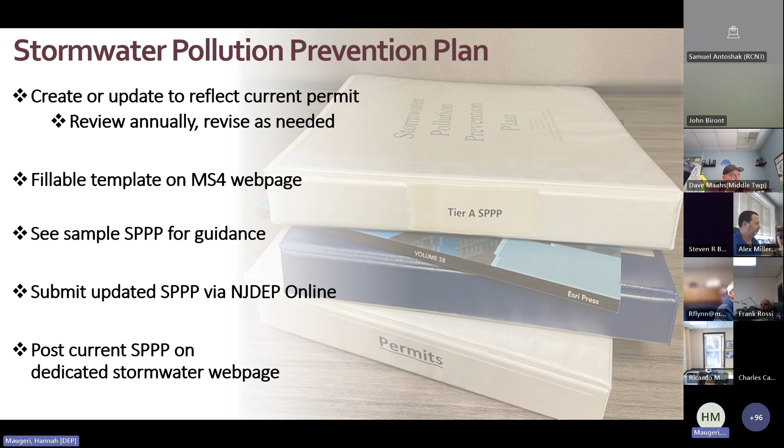So our biggest tip that we have is to take advantage of this template, and we also have sample SP3s that you can use. As mentioned, it's a fill-in-the-blank style template, and we have a sample if you want to get an idea of how to fill it out. The links here on the slides will take you to your appropriate SP3 template and sample. Roughly every 5 years, we renew the MS4 permits, so we'll update our templates and samples whenever that happens. As mentioned, you're not required to use them, but it's probably the easiest approach. If you do make your own SP3, that's completely fine. Just make sure you cover all the same topics with the same level of detail that we're asking for.

All right, moving into public involvement and participation, including public notice. Public outreach is something that all municipalities and public complexes have been required to do from the beginning of the MS4 program. To comply with state and local public notice laws, you will need to announce certain permit-related actions to let your community know when important updates are happening, such as the adoption of stormwater ordinances or the municipal stormwater management plan. Public notices are typically announced in newspapers, social media, and websites. You may also choose to send a direct email to residents and businesses in your town or residents living on the public complex property.

Stormwater materials must be posted on a dedicated stormwater webpage on your municipal or public complex website, where the public can find all stormwater materials in one place. Having a dedicated stormwater webpage is something new for all permittees, though original Tier A towns were already required to post materials somewhere on their website.

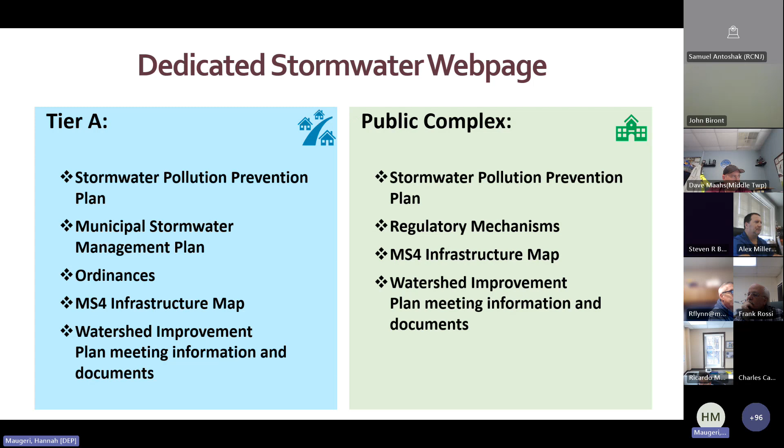Moving into local public education and outreach. As in previous years, the SPC will arrange for a variety of education and outreach to the public. For Tier A municipalities, we're still using a 12-point system where you can select activities from at least 3 of the 5 categories we describe in the permit attachment. One activity must educate on the hazards of illicit connections and improper disposal of waste.

Keep records of your activities and report them in your annual report. If you need ideas or materials, we have some on the MS4 webpage that you can use. For example, we have template style flyers that you can copy, insert your own town name and contact information, and then mail it out with something you were already going to mail, like your tax bills.

For public complexes, the public education requirement only applies if you have residents living on your property, such as colleges, universities, or military bases. You also need to earn at least 12 points.

However, the point system was simplified in the 2024 permit renewal. Now there are only 3 categories to choose from, where you must choose at least one activity from each category to earn the required 12 points. Similar to the Tier A requirement, one activity must educate on the hazards of illicit connections and improper disposal of waste.

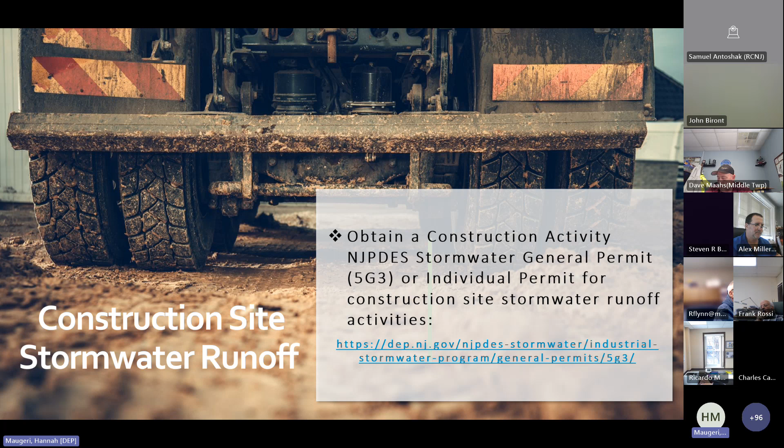Construction site stormwater runoff. The SPC must ensure that all entities whose construction projects will disturb 1 acre or more, or are part of a common plan of development that will disturb 1 acre or more, obtain a 5G3 or an individual industrial stormwater permit before starting construction. This is not a new condition to either permit, but please note that the 5G3 permit was renewed in 2022 with some minor changes. It applies to projects undertaken by the permittee, as well as private companies and individuals.

Post-construction stormwater management in new development and redevelopment. This condition highlights the requirements related to stormwater management designs for major development projects. If you're the SPC but not the engineer, you won't need to know the technical details, but you do need to be familiar with the process.

Engineers who review and approve major development projects must be different from those who design the projects. They can work at the same firm if that's something that you outsource, but the person who designs it can't be the person who reviews it.

Review engineers must complete the department's Stormwater Management Design Review (SWMDR) course every 5 years to stay certified. They also need to attend training on rule amendments if the department determines that training is warranted. DEP certification has always been required for original Tier A towns and public complexes, but it's a new requirement for new Tier A towns and new public complexes. We'll talk more about this when we get into the training section.

You can check our webpage for the list of department certified engineers to confirm the status of your engineer for your facility. The reviewer must ensure that the projects are designed in accordance with the 7:8, the BMP manual, and constructed according to the approved plans.

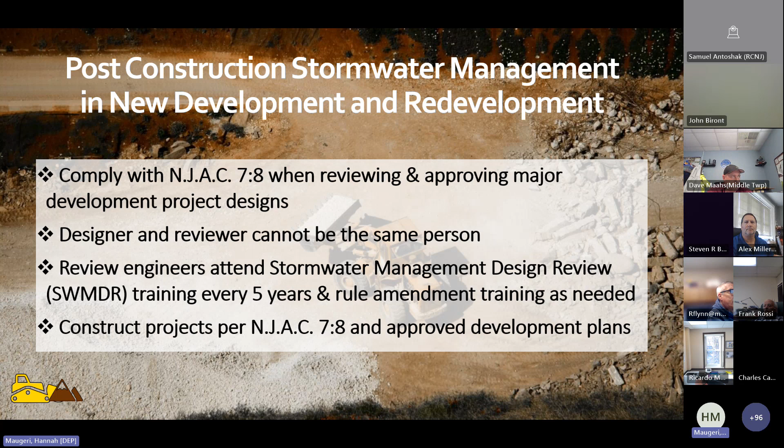For Tier A permittees, the MSWMP is a high-level description of your municipality's strategy and stormwater infrastructure used to reduce flood damage, minimize stormwater runoff and soil erosion from development, maintain groundwater recharge, maintain stream integrity, and minimize pollutants in stormwater runoff, all in a way that protects public safety. This is part of the town's master plan.

The MSWMP has been a requirement of previous Tier A permit iterations and the old Tier B permit. If you're not familiar with this, check out the MSWMP model posted on our webpage. The department will be updating our model at some point in 2025 to reflect the most recent stormwater rule amendments. Even when there are no changes to your MSWMP, the town needs to re-examine it at least every 10 years, along with the master plan, and send it to the county for reapproval.

The Stormwater Control Ordinance, or SCO, is your town's mechanism to enforce proper stormwater management designs for major development projects. This is also not a new requirement for original Tier A's and new Tier A's, as it was required in previous permit iterations as well. For starters, you should know what your town considers a major development project. Does it match the definition in the stormwater management rules, or is it more stringent?

In July of 2023, we shared two versions of the department's revised model SCO and posted them on our website to reflect the most recent stormwater rule amendments. One includes language that simply cites the applicable subchapter and sections of the stormwater management rules instead of the full text, so when the rules change, you don't necessarily need to amend your SCO. The other is a longer, more detailed version that includes the full text. So if you use that one, future amendments to your SCO will be more likely.

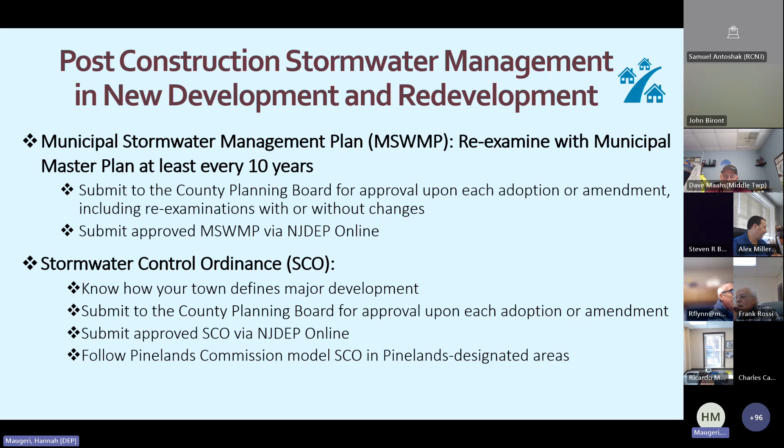Each amendment to your SCO must be submitted to the County Planning Board and the department and be posted on your dedicated stormwater webpage. Pinelands towns should follow the Pinelands Commission's SCO model in designated areas. This means for towns that fall partially within Pinelands areas, you will be required to have two SCOs to reflect the different areas of the town. The permit requires updates to the MSWMP and SCO to reflect amendments to 7:8 within one year of rule adoption.

Mitigation plans are an option for both Tier A permittees and public complex permittees. If your facility wants the ability to grant variances from the design and performance standards for your stormwater management measures, there needs to be a written mitigation plan that satisfies the criteria in the stormwater management rules and identifies the measures necessary to offset the deficit created by granting that variance. Each time your facility grants a variance, you need to send a report describing the variance to the department via NJDEP online within 30 days of the approval.

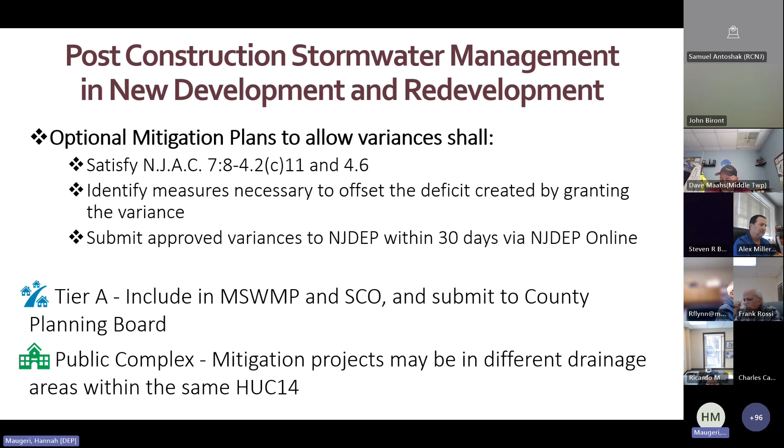For Tier A permittees, the mitigation plan must be included in your MSWMP and SCO, and you also must submit a copy of the report for each approved variance to your county planning board. For public complex permittees, the measures necessary to offset the variance can be provided through a menu of design and performance standards with corresponding mitigation projects for different drainage areas within the same HUC 14.

Ordinances and regulatory mechanisms. Earlier we talked about the stormwater control ordinance for Tier A permittees, which is related to major developments. This set of ordinances and regulatory mechanisms is aimed at minimizing stormwater pollution and flooding throughout the community, not just at major development sites.

The purpose of community-wide ordinances and regulatory mechanisms is to have methods in place to keep pollutants out of the stormwater so it doesn't make its way to streams, lakes, and other water bodies where it can contribute to harmful algal blooms, cause beach closings, and a host of other negative impacts. They help keep the community clean by setting a standard for the public and ensure you have a way to punish those who violate these ordinances and regulatory mechanisms.

Let's briefly go through each community-wide ordinance and regulatory mechanism that permittees are required to adopt and explain their purpose. First, we'll talk about the ones that apply to both Tier A and public complex permittees.

Pet waste: this is intended to require people to clean up after their pets so their waste stays out of the stormwater system and ultimately out of the watershed. For public complex permittees, this can also be used to prohibit pets other than service animals from being allowed on your property. Wildlife feeding: this is intended to keep people from feeding wildlife like ducks and geese, to discourage them from gathering where they can leave droppings and pollute the watershed.

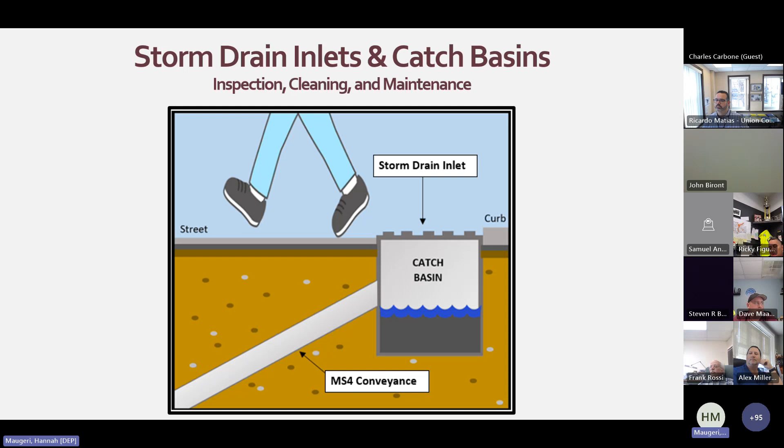Let's talk about the difference between storm drain inlets and catch basins. This little cartoon picture is cute. The storm drain inlet is the top grate that you can walk over, like this guy. You can walk over it, you can drive over it, and if it's along a curb, it includes the curbside opening part. So we consider the inlet to be the parts you can see on the surface. The catch basin is below the surface, either straight below the inlet or sometimes further down the pipe.

Here's some real life photos. The picture on the left shows an inlet that needs cleaning, labeling, and retrofitting - all things are wrong with it. It's missing the bar along that curbside opening, so we'll talk more about that in the next slide. The one on the right, the inlet grate has been removed, allowing you to see the catch basin. Just be careful - you never know what you're going to find down there.

We're going to be silly every once in a while. This catch basin has some trash and leaves in there that needs to be cleaned out. So that's what we're talking about - storm drain inlets on the left, catch basins on the right.

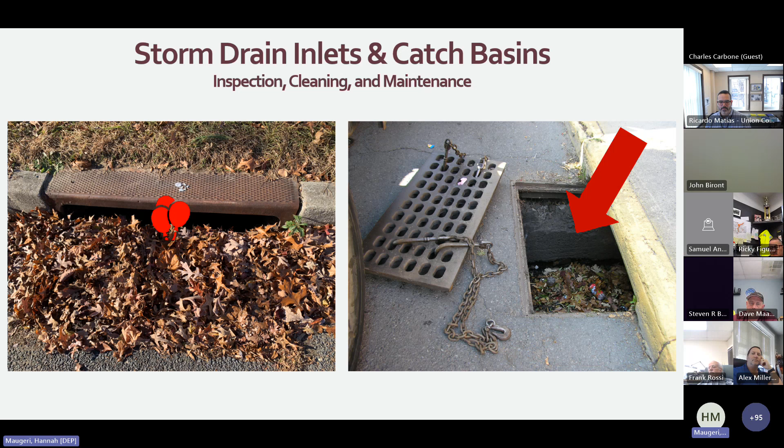Let's talk about the structure with the labeling. For storm drain inlets, there's a few things to keep in mind. First, they need appropriate labels to indicate that they drain to waterways. Newer inlets have this wording permanently cast into the structure, so you don't have to worry about it, like the picture on the bottom shows. If you have an older model inlet that doesn't have this, you can attach a button on it, like the one above that says no dumping. Otherwise, you can paint a message with a stencil, or get creative and do an artistic design to convey the same message.

All permittee-owned storm drain inlets need to be retrofitted by the end of your permit cycle. For Tier A's, that means by the end of 2027, and for public complexes, by the end of 2028. You do not need to replace these inlets - you don't have to rip them out and put new ones in. What you do need to do, if nothing else, is add a bolt-on plate across that curb opening if you have an old style structure, like the one in this top right picture.

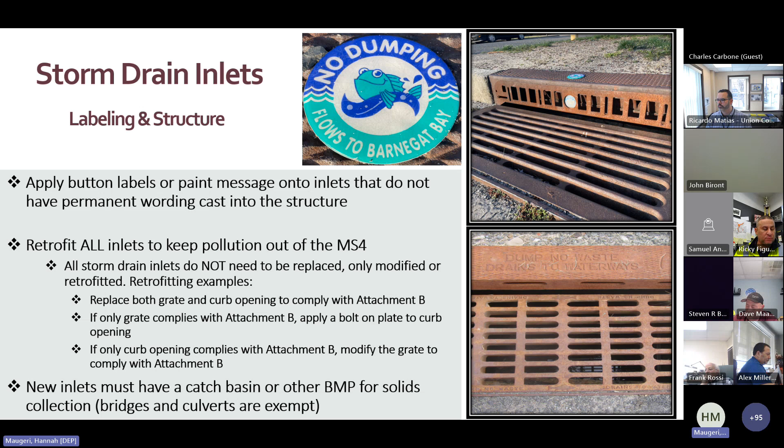If you're installing a brand new storm drain, you're required to use the new style inlet that complies with the NJDOT design for bicycle safety. We have those requirements in attachment B of the permit. New storm drain inlets also need a corresponding catch basin designed for solids collection. It can be directly below the inlet, or a little downstream, as long as it's prior to discharging to surface water. Storm drain inlets on bridges and culverts are exempt from the catch basin part of this requirement. That's pretty much everything about the structure.

Let's talk about inspection, cleaning, and maintenance. For storm drain inlets, remember the top part you can see - these inspections are super easy. You can just drive around and take a look at what they look like. If there's a problem, you hop out of the truck and clear off the trash, leaves, branches, or whatever debris needs to be removed.

Or if you see signs of damage while you're driving, you can just stop and see what needs to be done. So because it's so easy, we require that all permittees, Tier A and public complex, inspect all of their storm drain inlets once a year.

Catch basins, on the other hand, do involve a bit more work. The inspector would need to get out of the truck, look down inside with a flashlight or a stick, and possibly lift the inlet grate to see if the catch basin needs cleaning. For Tier A permittees, the requirement is to inspect at least 20% of your total every year on a rotation, so by the end of the 5-year permit cycle, all of your catch basins have been inspected. You can do it more often, but that's the minimum.

Public complexes have considerably fewer catch basins, so we require that you inspect all of your catch basins every single year. When it comes to catch basin cleaning, we don't tell you what to do—just check your manufacturer's recommendations. You can also look at the EPA; they have guidance on their website that advises removal of materials when the sump pit becomes 40% full.

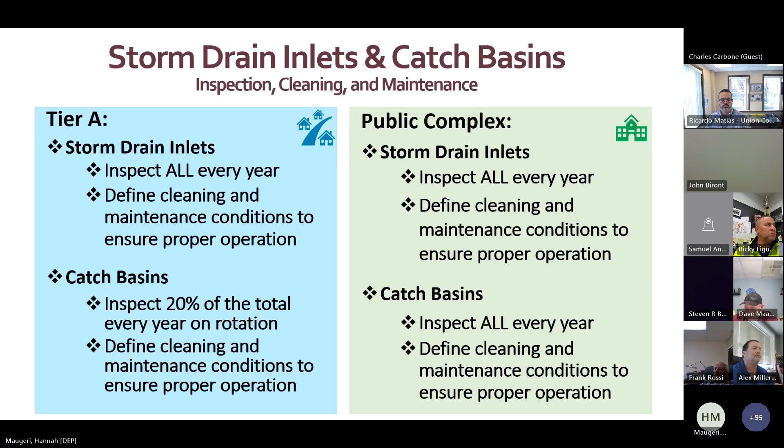All right, let's shift gears. Let's go to outfalls, where all your stormwater comes out. For outfall inspections, Tier A permittees, because you have a lot of these, need to inspect at least 20% of your total every year on a rotation, so by the end of the permit cycle you've hit all of them. Public complex permittees have way fewer, so we require that they're inspected every single year.

Whenever you identify or newly construct an outfall—sometimes during mapping you realize you didn't know this one was here—it needs to be inspected within 30 days of identification. The department has outfall inspection forms on our webpage to document your findings, if you don't have your own. These inspections need to include checking the structural integrity of the outfall, and looking for clogging, instances of stream scouring, and illicit discharge. We'll talk about that more closely in the next couple of slides.

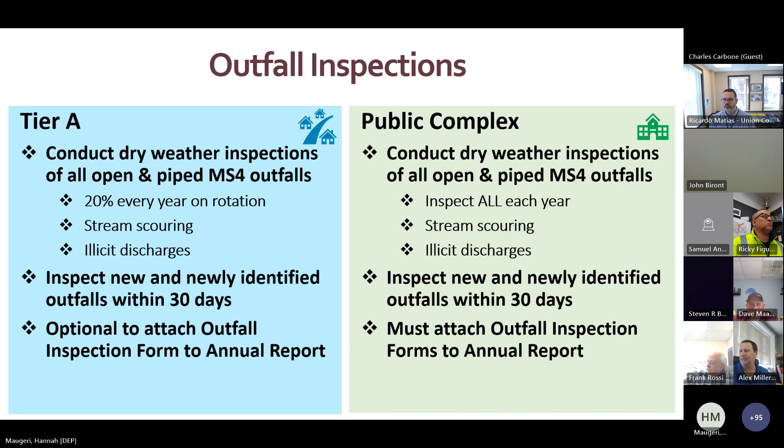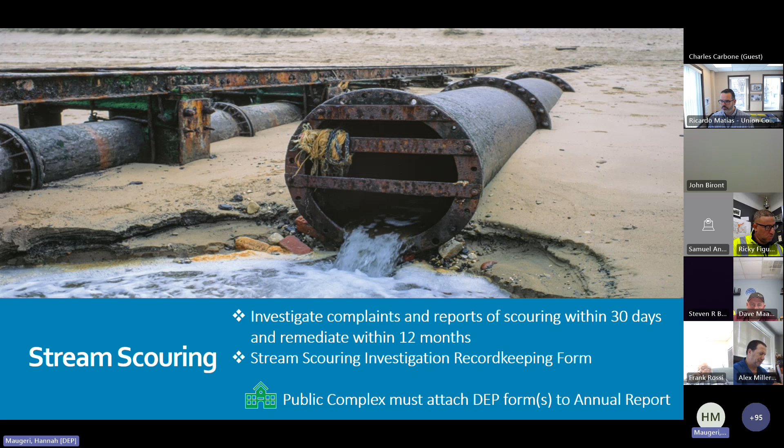Let's go over to illicit discharge. When you're at your outfalls, you're looking for the same things—structural integrity, scouring, and illicit discharge—making one stop for all these things. When inspecting for illicit discharges, look for instances of dry weather flow, meaning flow coming out of the outfall 72 hours after a rain event. Other indicators include foam, turbidity, colored or overly fragrant discharges, and the presence of sanitary waste items like that one.

All reports of illicit discharges need to be inspected within 30 days, and confirmed cases need to be remediated within a year of discovery. This is something both of you need to keep in mind: whether you're a Tier A or a public complex, all permittees that have an illicit discharge problem need to record it on the department's form and upload it with your annual report.

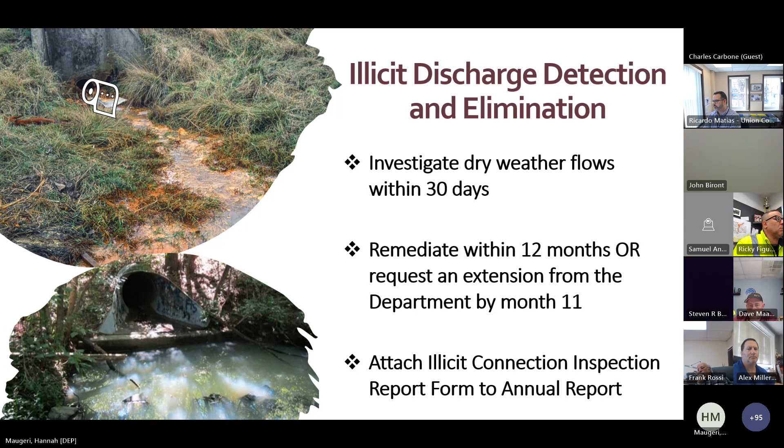Historically, very few outfall problems have been reported to the department, yet we have tons of problems with stormwater flooding and pollution persisting. So we've started working with the New Jersey Watershed Ambassador Program and other watershed groups using this new outfall observation form.

It's something for concerned citizens to report potential cases of damaged outfalls, stream scouring, illicit discharge, whatever's going on out there. This citizen science approach is a great resource to assist towns and facilities to identify potential stormwater outfall problems. We strongly encourage citizens to contact their municipality first to address these issues, but if it comes to us, the department will review these reports. Our first step is to reach out to you guys—we're not going to just come out there and go crazy with it. We're going to contact you to see what's going on, and most of the time you probably already know what's happening and can give us an update.

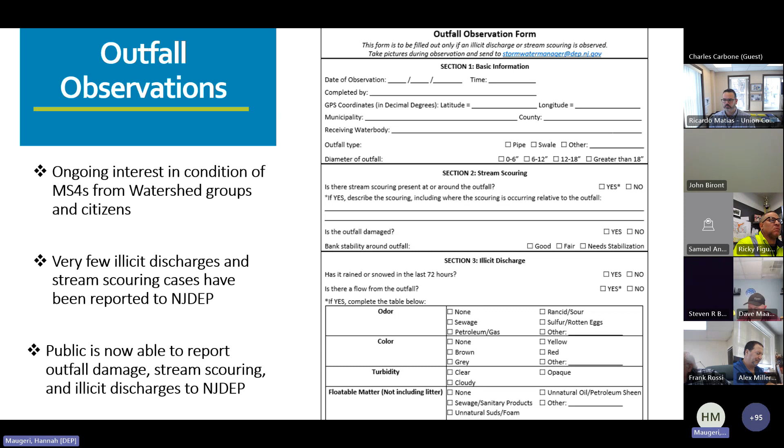Okay, so that's it for outfalls. Let's move over to MS4 conveyance systems. A stormwater conveyance system includes any man-made feature that conveys stormwater—typically pipes, ditches, swales, or concrete drainage channels, that sort of thing. It's not a new permit condition for MS4 permittees to manage these, but what's new is that you need to describe your inspection and maintenance program in your stormwater pollution prevention plan. And since you're putting it in there, you'll also be covering it in your annual training of staff who do work on the conveyance systems.

We do not specify in the permit exactly when you should do inspections and maintenance, since there's so much variation in conveyance systems. So what we ask is that you tailor your program to best suit your system. We do have guidance on our website if you need it, so feel free to check that out and reach out to your case manager if you need other help.

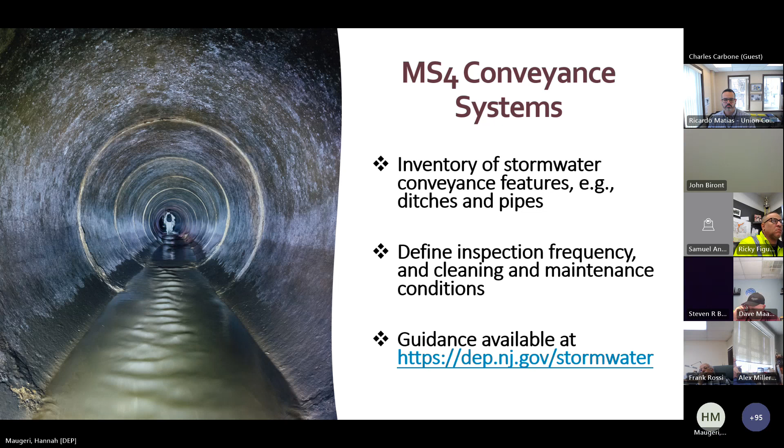So far we've talked about inspecting storm drain inlets, catch basins, outfalls, and conveyance systems, because those are really the most common components of stormwater infrastructure. But we know there are other features our permittees use, so we've created this catch-all condition. It applies to anything else you use in your town or facility to manage stormwater—things like infiltration basins, any kind of stormwater basin, a manufactured treatment device, anything else that moves, touches, or manages your stormwater that we haven't already talked about. This is what this is for.

So for anything that falls into this miscellaneous category, in your SPPP you're going to explain what it is and define the conditions that warrant cleaning and maintenance per approved maintenance plans. And if you don't have a maintenance plan to refer to, you can create one yourself following the department's BMP manual or our maintenance guidance, both available on our website. So if you need to refer to that, go for it.

And if the feature in question is unique and not included in our department BMP manual or guidance materials, and you don't have any kind of plan, what we're requiring is that you inspect these features at least 4 times a year and after each rainfall over 1 inch. If any of your infrastructure is found not to be functioning properly, you need to take care of it no later than 90 days from discovery. And if you need help—some of these are old, some you might not be sure what they are—just reach out to your MS4 case manager, and we have our engineering group who can put you in touch and point you in the right direction if you need guidance there.

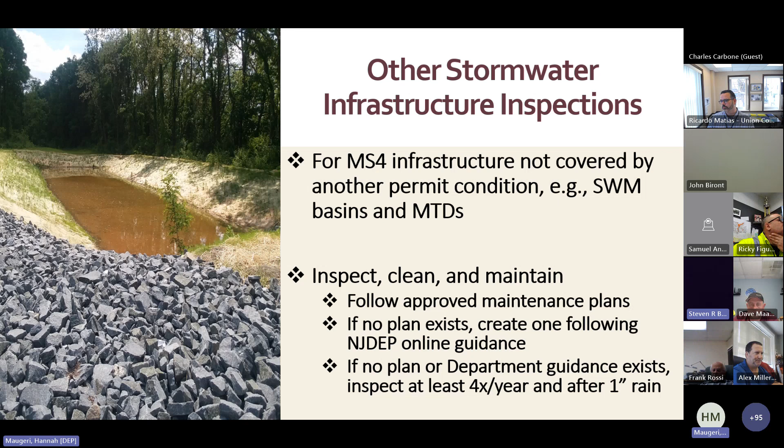Operation and maintenance responsibilities may be assigned to commercial property owners, developers, and homeowners associations. However, keep in mind that individual homeowners cannot be assigned these responsibilities for stormwater facilities designed to manage stormwater for the general vicinity. You can't put that on a single homeowner. That is not okay.

The private owner or operator, if it's one of those other groups I talked about, commercial, developer, HOA, they're responsible for providing documentation to the municipality that the stormwater facilities on their property are inspected annually and maintained according to the maintenance plans.

You can go about doing this however you want. You can implement a program however works best for your town. Some towns choose to have private owners submit forms to them every year to say conditions are met, while other municipalities will do these inspections themselves and charge a fee to the private owner. That way they're sure it's getting done and the private owner doesn't have to worry about it.

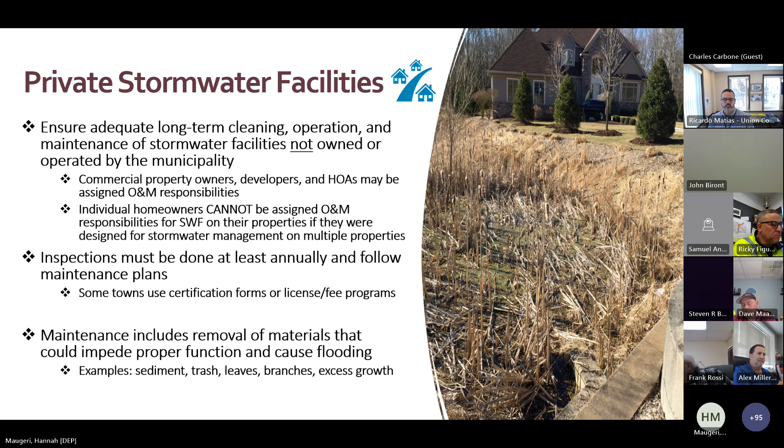All right, so that is all the infrastructure. We're going to move into good housekeeping now. So let's start with everyone's favorite, street sweeping.

Sweeping streets provides more than just aesthetic benefits. It keeps dirt, debris, and litter out of the stormwater system where it would otherwise pollute the watershed. It helps alleviate flooding, since storm drains can get clogged from this stuff, and it helps reduce the frequency of catch basin cleanings, which can be kind of a pain and expensive. So the more you sweep, the less of that you'll have to do.

You are only responsible for sweeping your roadways, and you do not need to buy a sweeper. That was a big concern a lot of people had. You can check with the county, the state DOT, or a nearby town that you know has a sweeper and see if you can arrange a shared service with them.

Something to keep in mind if you're a municipality or even a public complex - the county and the state have to sweep their own roads, some of which run through or around your municipality or facility anyway. So it might be worthwhile to reach out to them and say, hey, while you're at it, could you hit our stuff too? Or you can also hire a private sweeping company if that's your only option. Whatever you need to do is fine.

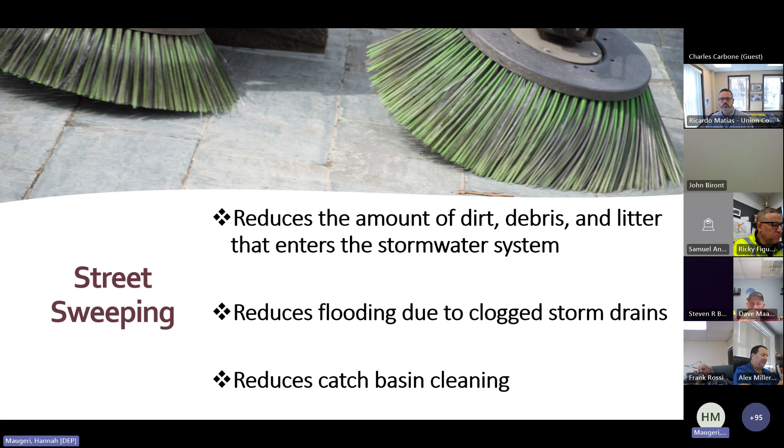As the SPC, you're responsible for making sure sweeping happens in accordance with your permit requirements. So we're going to talk about the different types of roads that need to be swept and what the requirements are in each of the different permits.

First of all, not all roads need to be swept, so please do not try to sweep tar and chip roads, dirt roads, or gravel roads. That will wreck your sweeper.

That on the left is a gravel road. On the right here, this is a road that has no storm drain inlets. There's also no drainage ditch or any kind of swale on the side there, so there's no way for the stormwater to reach surface water. If there's no way for the stormwater to run off and get into surface water, it does not have to be swept. We are strictly focused on keeping stuff off the roads from getting into waterways eventually.

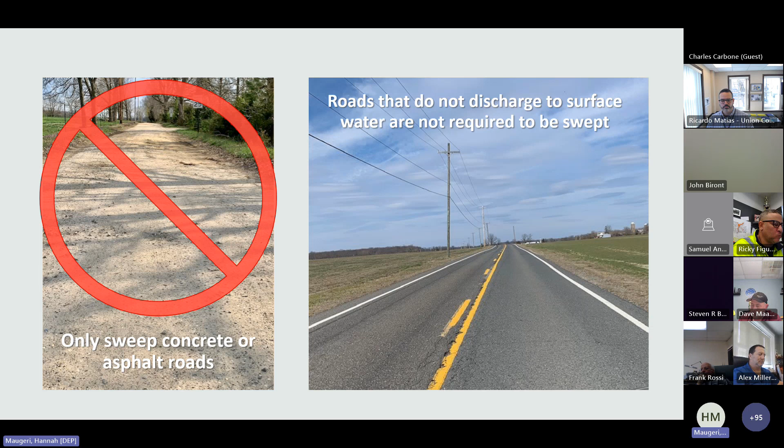Okay, so here's some that do need to be swept. This photo is one that needs to be swept because it has storm drain inlets that drain to creeks and things like that. If you have a really long road that only has storm drain inlets on one little stretch where it runs through a low area maybe, you don't have to sweep the entire road - you can sweep just the area of the road that drains to those inlets.

That's fine. Okay, here's a picture of a road - this is the road I live on, actually. It's a road that has no inlets at all, but there's a big old drainage ditch right there, and it connects to a creek. So if you have one of these, that's another type of road that needs to be swept. We know that there are some towns that will just put a ditch or a swale along a road that doesn't connect to anything at all. Then you don't have to sweep that.

If it's there just to get the water off of the road so it doesn't flood, that's great. But if it connects to a creek, you need to sweep it. If it does not connect and it's just there to let the water go down into the dirt, that's fine. You don't have to sweep it.

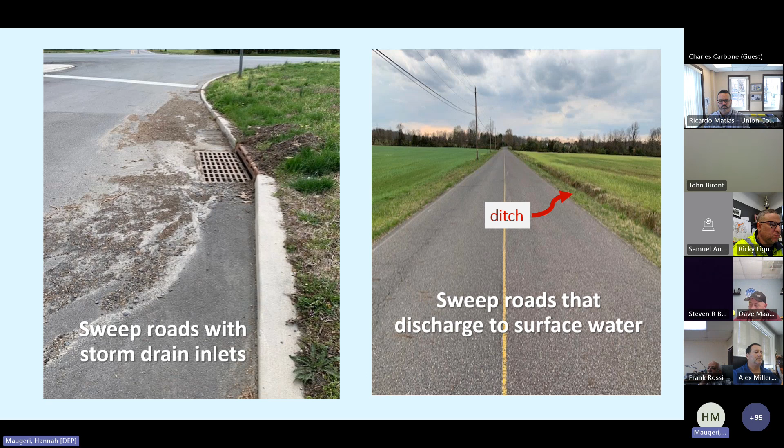So we talked about what kind of roads get swept. Let's talk about what the schedule is. This first slide is for the Tier A's.

Your sweeping requirements have changed from the previous permit to this permit that we renewed in 2023, so please pay attention if you haven't focused on it before. Roads with storm drain inlets need to be swept at least 3 times a year, roughly every 4 months. Roads that don't have inlets but discharge to surface water, like those drainage swales I showed you, need to be swept at least once a year. And remember, you're only sweeping your municipal roads that discharge in some way to surface water.

For new Tier A municipalities, the ones that were formerly Tier B's, street sweeping is a brand new condition. For the original Tier A towns, the criteria for sweeping has changed from the previous permit. So everyone has a little bit of time to set up and get plans in place. You have until January 1st of 2026 to put your sweeping program into practice.

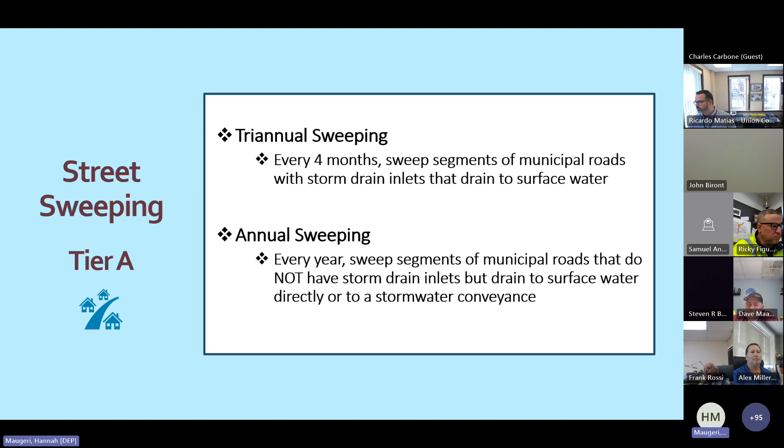Okay, so I'm going to talk about street sweeping for public complexes now. The requirements have not changed from the previous permit, so this is pretty easy for you. Every single month, you're going to sweep paved areas that have storm drain inlets that drain to surface water.

This is going to be parking lots like this, any kind of parking lot with inlets, or if you have a parking garage. This is a little roadway that has an inlet on it. The one on the left is a hospital. I think the one on the right, I don't remember what that is.

For most public complexes, there's very little sweeping to do, sometimes no sweeping to do because it just depends on your setting. Some larger facilities might be in an industrial complex or more of a community setting like a college campus, for example. If you have streets on your property that do not belong to the municipality, the county, or the state, you're going to be looking for this.

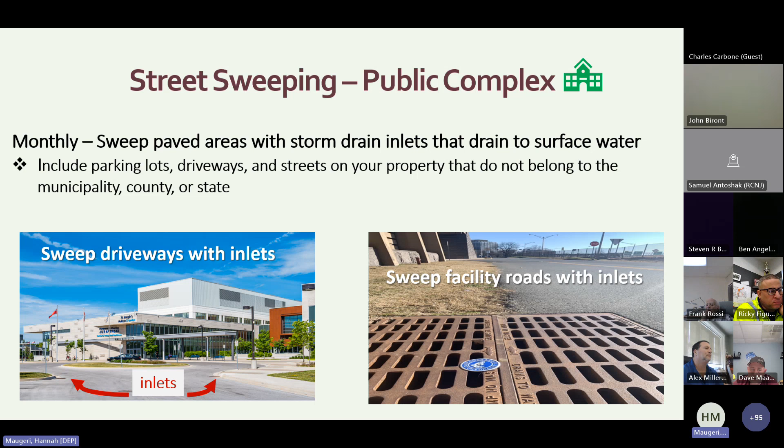Do you have inlets? Yes or no? If you do, you're sweeping that area every month. Okay, so I hope that's straightforward.

All right, another good housekeeping item here. Let's talk about herbicide management. If you use herbicides to kill weeds, I know not everyone does, but if you do, the stormwater program coordinator, that's you here in the training, needs to ensure that they're being applied properly. You want to prevent it from getting washed into the waterways or causing erosion from devegetation.

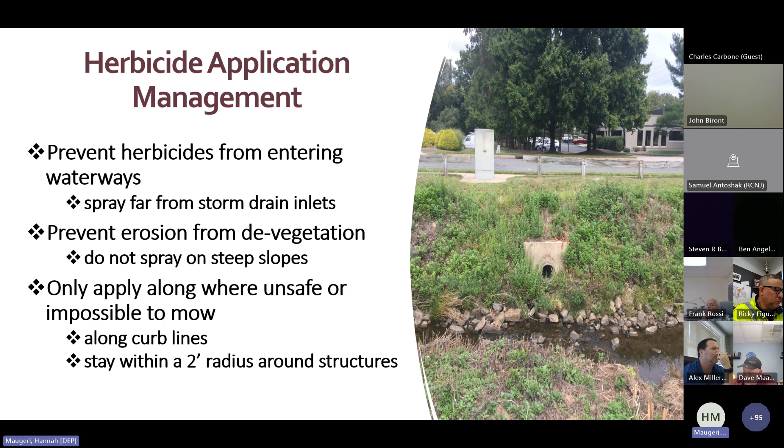Your staff is going to need to know to avoid spraying herbicides on or near storm drain inlets or on steep slopes, and only spray in areas where it's unsafe or impossible to mow. When you're spraying around structures like a telephone pole, keep it in a tight little circle of 2-foot radius. That's the requirement for that.

Excess de-icing material management. I wish we had rephrased this in the permit to be a little more clear because we've had some confusion. The management of excess de-icing material is not related to how you store your salt supply at the maintenance yard. We are going to talk about that a little bit later.

This particular condition, though, is aimed at cleaning up those little piles that are sometimes accidentally left behind in parking lots or along roadways where the driver starts and stops the spreader. Some of you have nice equipment and it doesn't do this, but I guess the old style sometimes leaves these little piles. This is from a real accidental pile that happened.

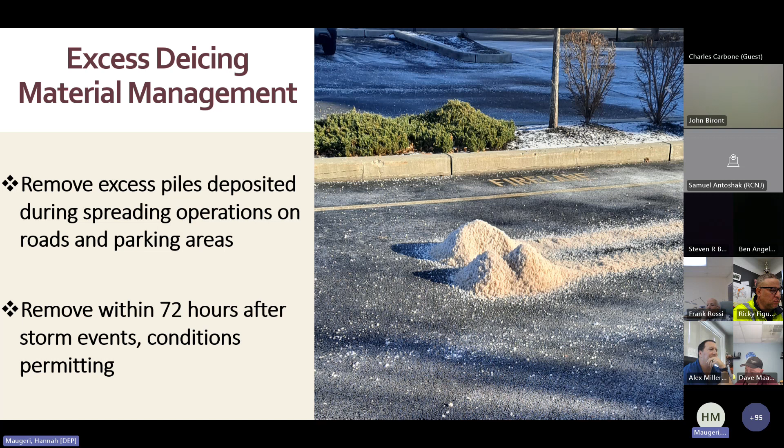So the requirement is within a couple days after the storm, you have 72 hours, whenever it's safe, check where your spreaders have worked and clean up any little piles you find. This way it doesn't get washed into the nearby waterways. Okay, I hope that clears that one up.

All right, let's talk about roadside vegetative waste management. Here we're talking about tree trimmings, grass clippings, and leaves. Any grass, leaves, or tree branches that get into the MS4 have the potential to clog the conveyance system and cause flooding. These materials also increase the levels of nutrients and total suspended solids in receiving waters, which can eventually end up as harmful algal blooms, and interfere with the aquatic habitat.

We are aware that some residents blow grass and leaves into their storm drains or storm swales to make it disappear as they're cleaning up their properties. Earlier Hannah discussed how municipalities would adopt a yard waste ordinance to combat that, to have a mechanism to tell people you can't do that. So for public complexes with residents on their properties, you can also enforce your yard waste regulatory mechanisms to have an avenue to stop this behavior.

This particular permit condition, though, is not for the residents. This is for you guys, for your staff. This is a requirement to make sure your staff are not doing the same exact thing. They too have to handle these types of vegetative waste in a way that keeps it from entering the stormwater system. So for example, you may want to not bag your grass clippings, just leave them where they fall. And if you do clean up the vegetative waste, maybe trimming trees along your roadway, just in your SWPPP, explain how you keep it out of the stormwater system. Maybe you pick it up and take it to a facility, like a recycling facility. But what we want to hear is that you're not letting it wash into the storm drain.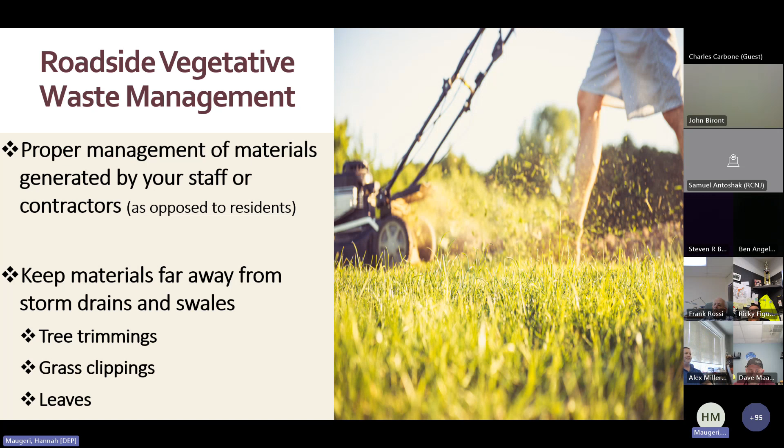Roadside erosion control. So roadside erosion can cause a bunch of problems - sedimentation of receiving waters if it's just a little bit, and it can also pose a real public safety concern.

You must have a roadside erosion program in place, even if you have curbed roads. One of our towns told us they don't need to do that because they have curbs, but erosion can still happen on a curbed road. So whether or not your roads are curbed, please have an erosion control program in place.

It's really an easy one to accomplish. You can do this while you're out doing other stormwater inspections - maybe while driving around checking your storm drain inlets, also be peeking over to see if there's any erosion happening, kill two birds with one stone. If you do see some problems, the department allows 3 months to address it. And if you need more time, give us a call and let us know what's going on, and we'll authorize some extra time.

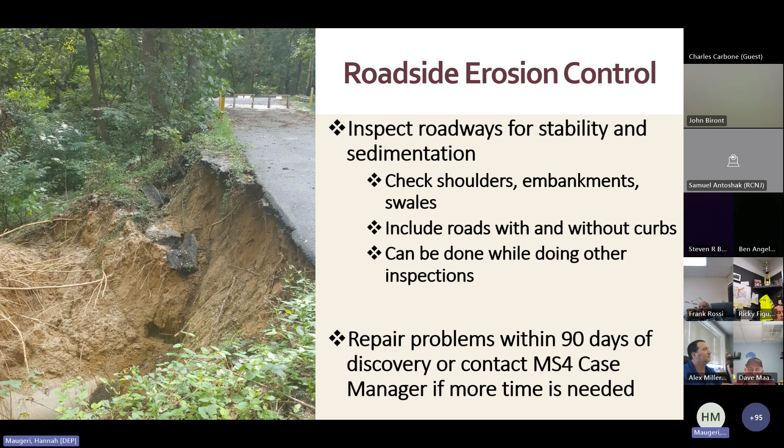And this one is just for public complexes because Hannah already talked about illicit connections for Tier A's in the form of an ordinance. So this is not an ordinance - this is really just a permit requirement, a good housekeeping kind of requirement for public complexes.

It simply means that nobody can discharge into your storm drain. So no one should hook a sanitary wastewater pipe from a home sewer or a business sewer into your storm drain system on your property. The way you might find these illicit connections is if you're checking your outfalls and you find some sort of problem there, you're going to trace it back and you may or may not find that there's an illicit connection happening.

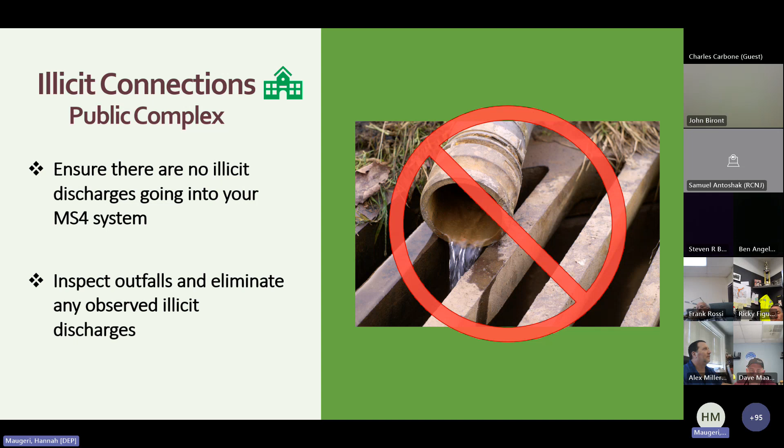Okay, and my last slide here is, again, for public complexes. This is for tree replacement management. So Tier A's, you have an ordinance that covers this. Public complexes, you don't have an ordinance - this is just a good housekeeping practice that you need to keep in mind.

So let's first talk about exemptions because there are lots of exemptions. Don't be afraid, don't worry about this particular requirement. If there's a tree that's a hazard, any kind of hazard - I'll talk about what that means - you can remove it. It's absolutely fine, it does not count.

Any kind of hazard tree would include trees that are diseased, infested by insects, dead, or dying. Go ahead and please get rid of those - they don't count, we don't want them, it's fine. Also, you can go ahead and remove trees that obstruct traffic signs, pedestrian walkways, or obstruct the safe passage of vehicles. And if you have a concern about the condition of a tree, you can have an arborist come out and check it out.

And if the arborist declares that a tree is a threat, remove those too—they don't count against you. The permit condition only comes into play when you're removing a perfectly healthy tree from public complex property. Depending on the size of the healthy tree being removed, you'll need to replace it with one or more trees. It's stricter for street trees, those planted along a sidewalk, median, or public roadway. You can't wait years to do it; you must remove or replace the tree within one year.

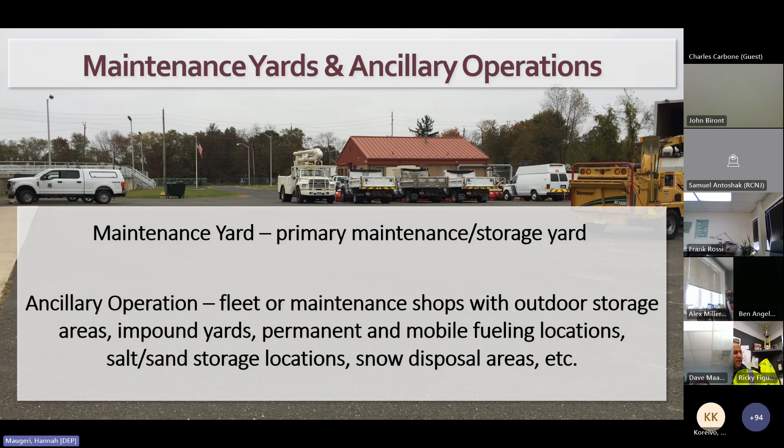For permittees who have residents, this can also include sites where you allow residents to drop off trash, recycling, yard waste, used oil, etc. There are specific BMPs that must be implemented at each maintenance yard and ancillary operation, so let's go through them now.

First up is site inspections. Usually the DPW or maintenance supervisor will designate someone to inspect each yard, or they will do this themselves. The inspector will note the conditions and document any work that is done or needs to be done to fix problems.

Inventory list: keep a list of all materials and machinery that are exposed to stormwater since they are a potential source of pollutants.

Container labels: be sure to label all containers so that they are clean and easy to read. Spill kits: keep a spill kit near any liquid transfer areas and make sure it's protected from the elements. Be sure to use dry methods only, for example kitty litter or sawdust, and sweep it up for proper disposal afterwards.

Bulk liquids: some of you may have above ground fuel tanks of fuel, used motor oil, or liquid deicers. Be sure to surround these tanks with a secondary containment barrier, such as a spill containment dike, to contain any drips and spillage that happen during operations. This is preferable over just a double-walled tank to capture spills.

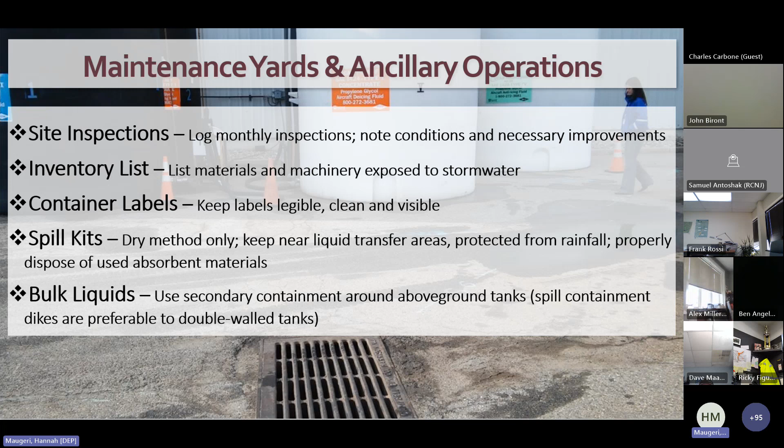Next up is fueling and other bulk liquid transfers. During operations, be sure to use drip pans below hose and pipe connections and block any nearby storm drain inlets. Don't delay repairs or replacement of broken fueling equipment. Post signs prominently in the fueling station with the specific language outlined in the permit, and we also have a sign template posted on our MS4 webpage that you can copy if you'd like.

Discharge from secondary containment: when you empty the stormwater from the collection area surrounding the tank, be sure to dispose of it properly. If you've determined it's clean, you can open the valve and let the stormwater flow out. However, if it appears contaminated, or if you're not sure, please haul it off-site for proper disposal. If the contents inside the tank are clear, you may not be able to determine if any material got mixed with stormwater, so in this case, assume it's contaminated and haul it off-site for disposal.

Vehicle and equipment maintenance and repair: perform these activities indoors whenever possible, but if you must work outdoors, use portable tents and drip pans and work in areas far away from storm drains if you can, or block any nearby storm drains.

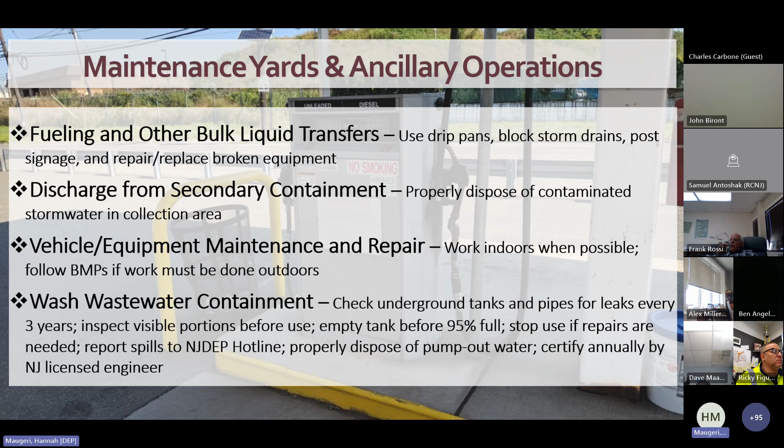Wash wastewater containment. Wastewater tanks need to be certified each year by a New Jersey licensed engineer. Underground tanks and pipes must be checked for leaks every 3 years, and the visible portions should be checked before every use. Check the capacity and pump out prior to reaching 95% storage capacity in the tank, and stop use immediately if repairs are needed. Report spills immediately to the NJDEP hotline and properly dispose of pump out water.

Salt and other granular de-icing materials. These materials must be stored in a permanent structure and in a way that minimizes exposure to rain, snow, and stormwater runoff. If you don't have a door on the structure, that's okay. Just be sure to keep the materials from overflowing beyond the protection of the storage structure. Sweep up any tracked or spilled materials after any loading and unloading events.

Aggregate material, wood chips, and finished leaf compost. Store these materials at least 50 feet from surface water bodies, storm drain inlets, ditches, and other stormwater conveyance channels. Use 3-sided storage bays, dikes, berms, hay bales, sandbags, and/or grading to minimize stormwater run-on and runoff. Storing these materials is fine, and finished materials may be stored on-site forever. However, if you process compost or do any chipping, grinding, screening, or size reducing of wood waste or yard trimmings, then you'll need an industrial stormwater permit for these activities.

Cold patch asphalt. This material must be stored indoors or stored on an impervious surface and covered with a waterproof material and contained to prevent materials from contaminating stormwater.

Street sweepings and storm sewer cleanouts. Keep these materials in a leak-proof container or stored on an impervious surface and covered with a waterproof material and contained to prevent materials from contaminating the stormwater. Materials may not be stored for longer than 6 months, or the town or the public complex would need to apply for a solid waste permit.

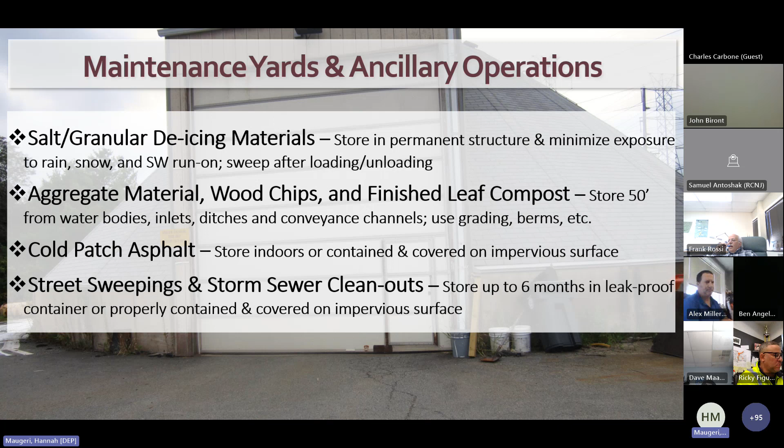Construction and demolition waste, wood waste, and yard trimmings. Store these materials at least 50 feet from surface water bodies, storm drain inlets, ditches, and other stormwater conveyance channels. Use 3-sided storage bays, dikes, berms, hay bales, sandbags, and/or grading to minimize stormwater run-on and runoff. Again, if you're doing any processing of compost, such as chipping, grinding, screening, or size reducing, then you'll need an industrial stormwater permit for this activity.

Scrap tires. Tires must be stored in a covered container or enclosure to prevent exposure to stormwater. Inoperable vehicles or equipment. Use tents, covers, and drip pans under leaking vehicles and check them during monthly site inspections. And finally, refuse containers and dumpsters. All trash containers and dumpsters on site must be covered when they're not in use.

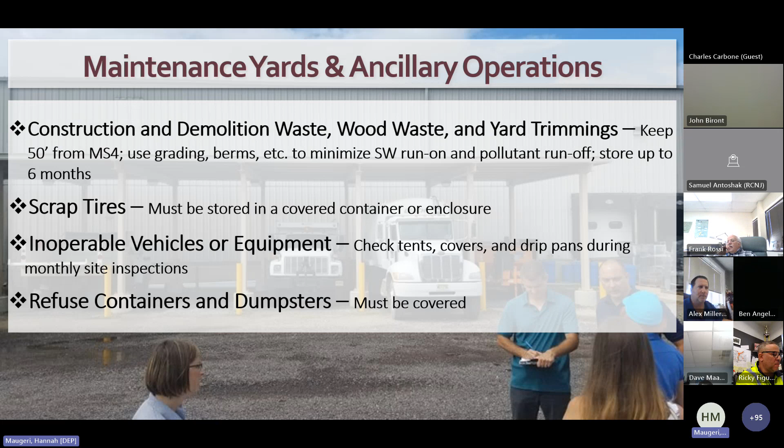So as I mentioned on a previous slide, the storage of wood waste, leaves, and compost is still covered under the MS4 permits. However, all composting, chipping, grinding, screening, or size reducing activities, even if it's just one time per year, are no longer covered under the MS4 permits and will now require a separate industrial stormwater permit called the Wood Waste Recycling and Leaf Composting General Permit. So if you're performing any of these activities on any of your sites, please reach out to your MS4 County case manager to determine if you're eligible for coverage under the WRC permit, or if you'll require an individual industrial stormwater permit. You can also visit the link on the slide here for more information about that permit as well.

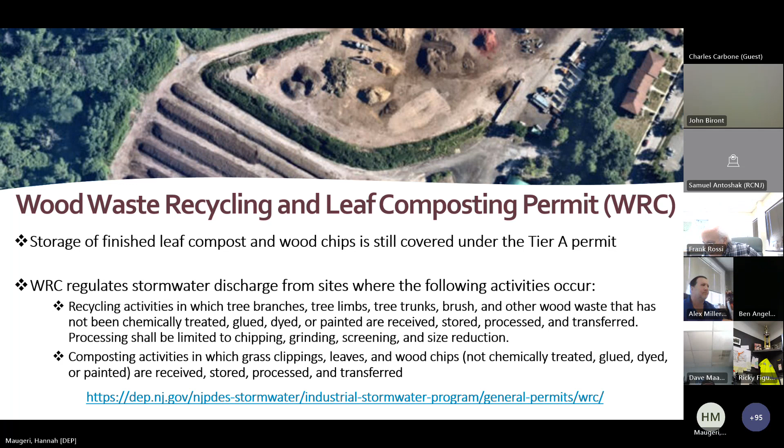Okay, so let's move into training requirements. So as the SPC, you are responsible for making sure that everyone is getting the right training at the right time. You are also responsible for making sure that training records are kept to demonstrate compliance with the training requirements of your permit. So let's go through each type of training requirement that's listed here on the slide.

So first up is Stormwater Program Coordinator training. Yes, this is the training that we're doing right now. We developed this training to make sure that the permit is interpreted and implemented correctly and consistently throughout the state. All SPCs are required to attend this training once every permit cycle, so about every 5 years. You are welcome to attend more frequently than this if you'd like a refresher, and you can also invite other staff who work on your stormwater program who want to attend as well. During training sessions, we're monitoring attendance to make sure that all SPCs for every town and public complex and eventually highway agency have been trained.

If you change jobs or retire, then someone at your facility would need to let us know who's going to replace you within 30 days. And your replacement must attend the next available live session. Again, we're planning to hold them at least twice per year. And we suggest that new SPCs watch the recorded training session that's posted on our MS4 website to hold them over until the next live session.

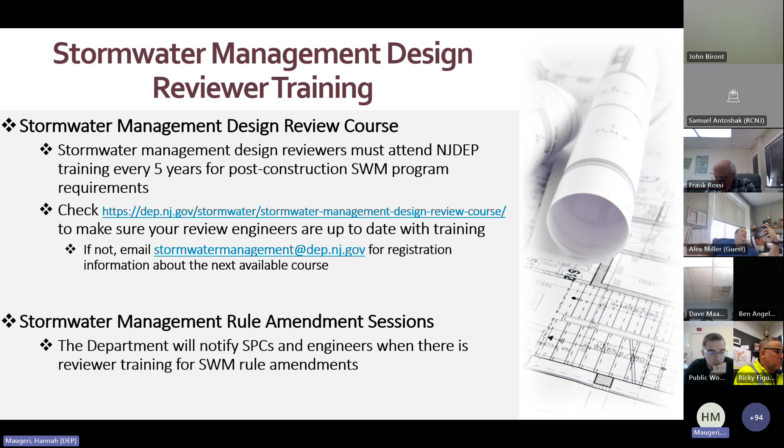Next up is municipal board and governing body member training, and this only applies to Tier A municipalities. Members of planning boards, zoning boards, and town councils who review applications for major development projects are required to be trained on an overview of the stormwater management rules. The department provides a set of brief videos that give a high-level description of the key considerations one should make when reviewing a project. The content and time commitment is nowhere near as extensive as the SWMDR course.

Okay, so let's shift gears from training to mapping. So talking about the MS4 infrastructure map, I'm first going to talk about the requirements for Tier A's.

Original Tier A permittees should have already mapped and submitted their stormwater outfall pipes in December of 2020. Mapping is an entirely new condition for any new Tier A towns.

With the 2023 permit renewal, all municipalities will now need to map all municipally owned or operated stormwater infrastructure. This means mapping everything that collects, treats, or conveys stormwater, including outfalls, groundwater discharge points, interconnections, storm drain inlets, manholes, stormwater conveyance systems, pump stations, and any other types of stormwater facilities that the municipality owns or operates. This will also include mapping the property boundaries of any maintenance yards and ancillary operations.

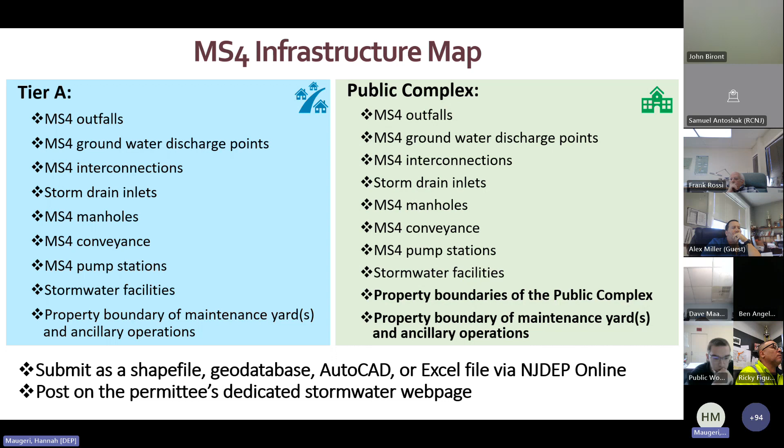Okay, so now that we've gone through the mapping permit requirements for both municipalities and public complexes, let's get into an overview of how the department is providing free mapping assistance to permittees and all the available options that we have for completing your mapping requirements.

It's important to note that whoever completes the MS4 infrastructure map should be aware of all the available options the department offers. Each method we're about to show you will satisfy the electronic submission requirement of your permit.

The department previously created a geodatabase template and associated data dictionary for 7 stormwater feature classes, which included the required outfall pipes for municipalities and the additional required stormwater facilities for public complexes from the previous permits. We're working to modify and update the template to account for all of the new infrastructure, the stormwater features required to be mapped by both permit renewals.

The department realizes that not every permittee operates in the same manner or has the same technological capabilities, so the geodatabase template was originally made available over several different collection methodologies in order to suit the needs of all of our permittees. So this included a template for ArcGIS Online that can be downloaded for desktop computers, smartphones, or tablets.

If permittees are familiar with or currently using either ArcMap or ArcPro, you can also download the geodatabase template that's on Esri through your own account. And finally, there's also a template provided in Excel format on our website.

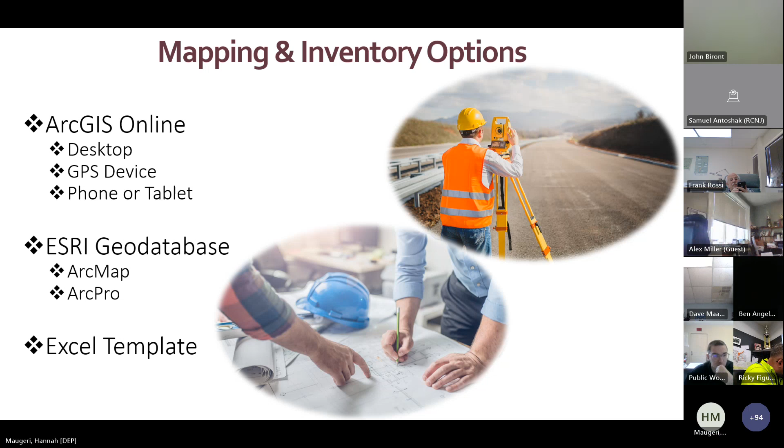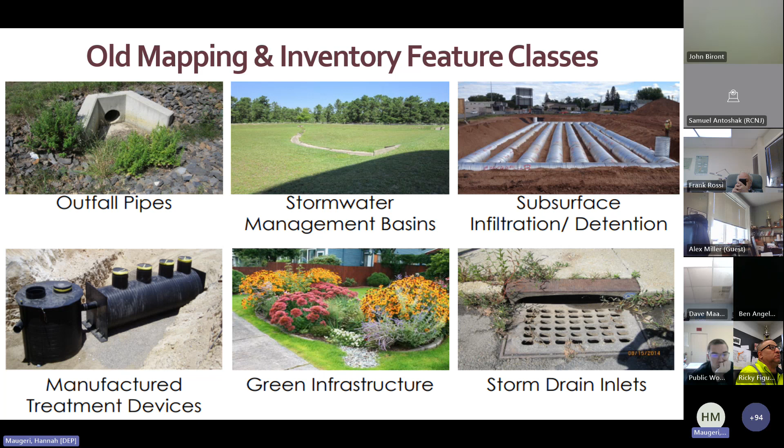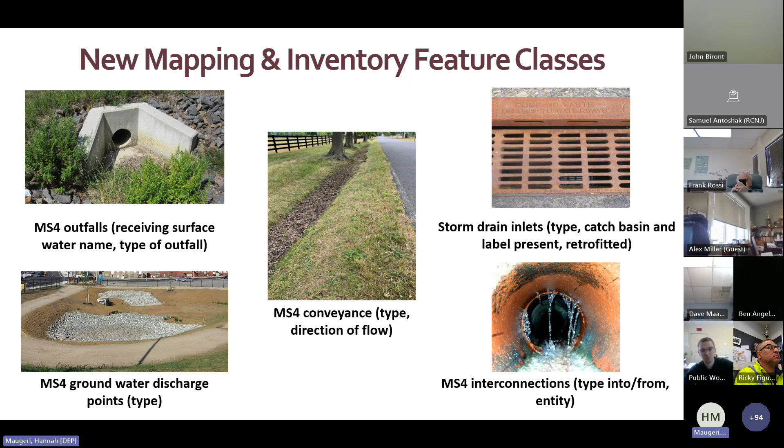Once the updates to the tool are completed to account for the new mapping requirements in both permit renewals, the tool will capture MS4 outfalls, MS4 conveyance, storm drain inlets, MS4 groundwater discharge points, MS4 interconnections, MS4 manholes, culverts, stormwater facilities, MS4 pump stations, and finally the property boundaries of maintenance yards and other ancillary operations.

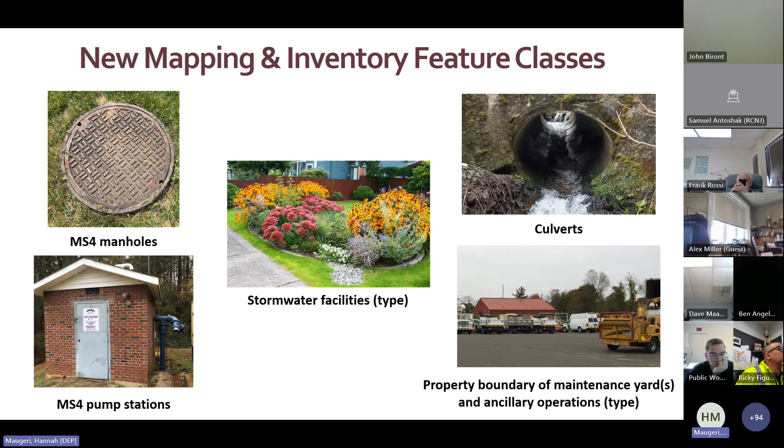If you've already mapped and submitted some of your data electronically using the old feature classes, we'll be able to migrate this data over to match the new updated feature classes. This way, none of your previous work or the data you collected would be lost in the translation.

The first method created was using a shared editing map through ArcGIS Online. This program allows users to collect points and associated information on a tablet, smartphone, or computer. The department secured a pool of free-to-use licenses for our permittees, and they are available upon request. Data that's collected will be stored in our database, can be viewed publicly, and downloaded at any time.

The desktop version of ArcGIS Online is a great way to electronically digitize points from the comfort of your office using an old PDF or tax map.

The second option available to permittees is a mobile application. The app is called ArcGIS Field Maps, and it allows users to collect points through ArcGIS Online. The app can be accessed through both the Google Play Store or the Apple Store. Some of you may be familiar with the previous version of the app called Collector, but Esri has since transitioned to using this new Field Maps app.

The app itself is free to download and use, and once a license is obtained from the department, you would have access to our shared editing map for MS4 infrastructure, and you can begin mapping. This is one of the best methods to collect new data points out in the field.

Once the app is downloaded, the user can collect points by using the mobile device's GPS or by manually placing points using an aerial background. When a point is placed, a list of descriptive attributes will show up and can be filled out. This helps in determining things such as the type of basin or MTD, as well as the ownership of the facility, which is important when conducting maintenance.

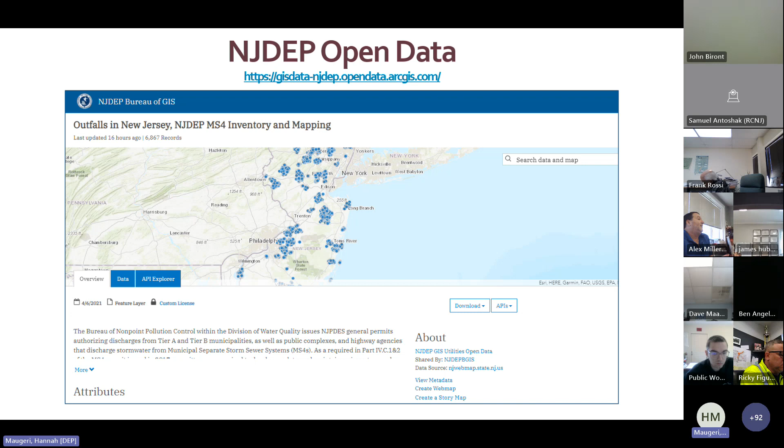As we continue to receive new submissions of data and review it, we will continuously post data to the site. If for some reason you're viewing your data on Open Data and you notice any errors, please reach out to your case manager and we can work together to get the errors corrected. NJDEP Open Data is the best way for users to download data that was previously submitted to the department.

So in summary, NJDEP initially created a database and data dictionary for the stormwater infrastructure features required to be mapped by MS4 permittees. It's currently being updated to account for the new mapping requirements in both the 2023 Tier A permit and the 2024 Public Complex permit. The data dictionary was made available over several different collection methodologies in order to meet the needs of all of our permittees.

Existing data can be accessed via NJDEP Open Data, as well as NJ GeoWeb, where you can view and download it. The department is willing to provide assistance in the form of in-person training and by answering any questions you may have. So if you need any assistance or have questions along the way, please feel free to reach out to us.

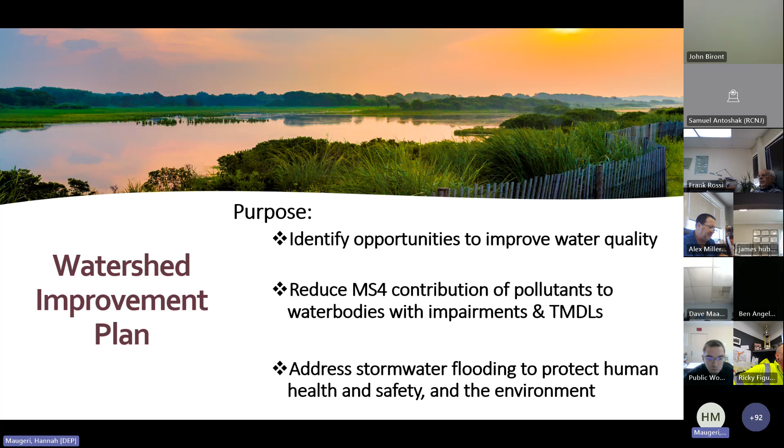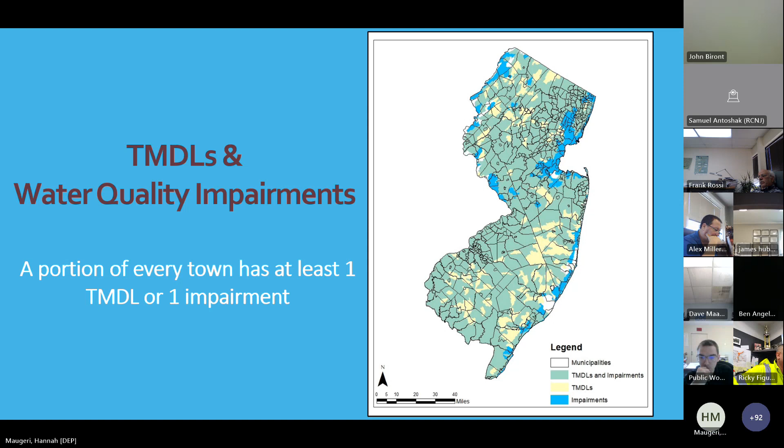All right, let's get into it. The development of the plan is divided up into 3 phases. The first will be due by January 1st, 2026 for all permittees. The goal of that first phase is to inventory all stormwater related information, which will then be used to inform what is likely contributing to the water quality and quantity problems, and where improvements could be implemented, which would then lead us into phase 2.

Phase 2 is going to be due by January 1st, 2027, a year after the first phase is due. The goal of the next phase is to evaluate the information that was gathered in phase 1, and then you're going to determine what potential improvement projects can be implemented to address both quality and quantity concerns.

Then by the end of that year, December 1st, 2027, you will submit the final phase of the WIP, which is going to select which of the potential quality and quantity improvement projects from phase 2 that you will implement, and you'll determine on what schedule you'll go through with them.

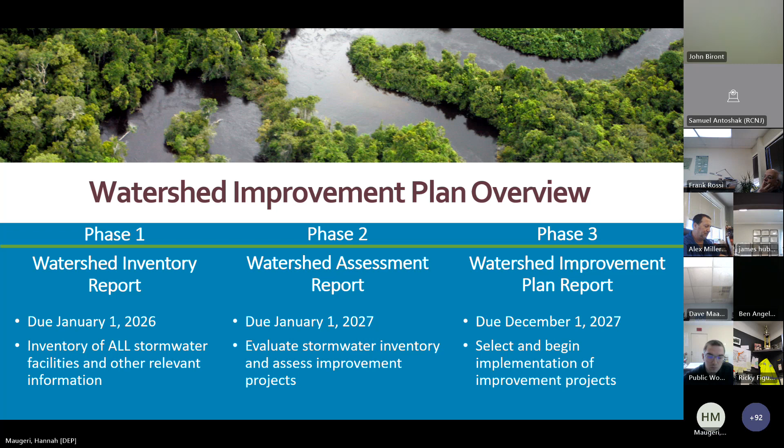Phase 1 will likely involve multiple staff members, as it is closely related to the MS4 infrastructure map that is required to be submitted on the same date. This report will involve combining the required MS4 infrastructure map information that we discussed earlier with additional mapping information that is available from the department, plus other information that the permittee must provide.

The additional mapping information available through the department that is required for both Tier A and public complexes will include the water body classification layers for the receiving water bodies. This could be anything such as FW2 non-trout, Pinelands streams, Category 1. The next thing would be the TMDL and impairments layer, and this would be by subwatersheds or HUC 14s, and that would show which pollutants are affecting that watershed.

The impervious area layer. And then if you're a Tier A, you'll also need to include the overburdened communities or environmental justice area layer. And then optionally, permittees are encouraged to add the layer showing where all NJDEP's regulated facilities are in each watershed.

All of these layers combined will begin to illustrate the connection between the water quality and quantity issues present upstream in your watersheds and may highlight potential sites where improvement projects may be implemented.

The permittee will also need to collect additional data that is not required by the MS4 infrastructure map and is not available from the department currently. This will include the drainage areas for each outfall or groups of outfalls, the drainage areas for each interconnection, and if you're a Tier A, you will also need to add the location of any private stormwater facilities within your subwatersheds.

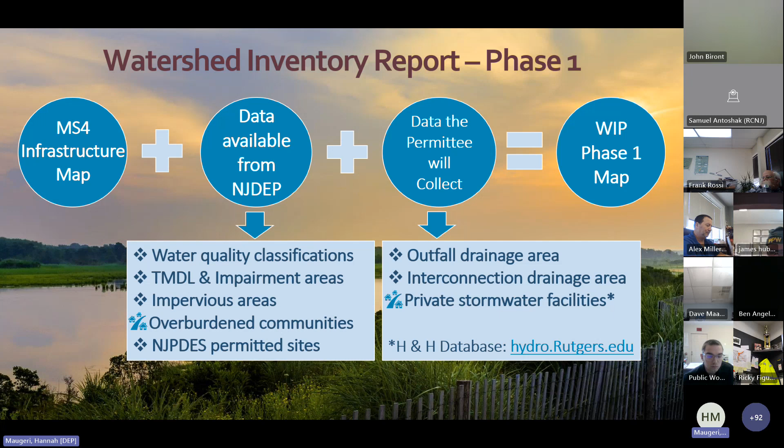So for regional collaboration, let's just talk about that before we get into the next phases. You may decide now or after the phase 1 mapping and inventory has been completed that you want to combine your improvement efforts with any of the following: other towns, other MS4 permittees, other types of NJDEP permittees, and even third parties such as a watershed group.

Public complex facilities are required to collaborate with municipalities during the WIP development process. These efforts should be targeted at municipalities that share subwatersheds with the public complex to reduce the pollutants for all receiving waters within and bordering the property. This collaboration is completely supported by the department.

However, to ensure that no one else speaks for your municipality or your public complex, any regional WIP collaboration would need to be endorsed in writing by each permittee and specifically state which part of the town in HUC 14 terms the regional WIP will apply to. It will also need to describe what specific projects and responsibilities will be undertaken by each entity. The regional WIPs will need that extra level of detail to make sure there is no misunderstanding between entities and the department is not misunderstanding anything either.

All right, jumping into phase 2, the watershed assessment report. This report will be created by using the map from phase 1 to identify potential water quality and quantity improvement projects targeting TMDLs and impairments in each subwatershed. The report will also need to include an estimate of the reduction of pollutants, a summary of feedback from the public sessions, an estimate of funding needs, and a tentative implementation schedule.

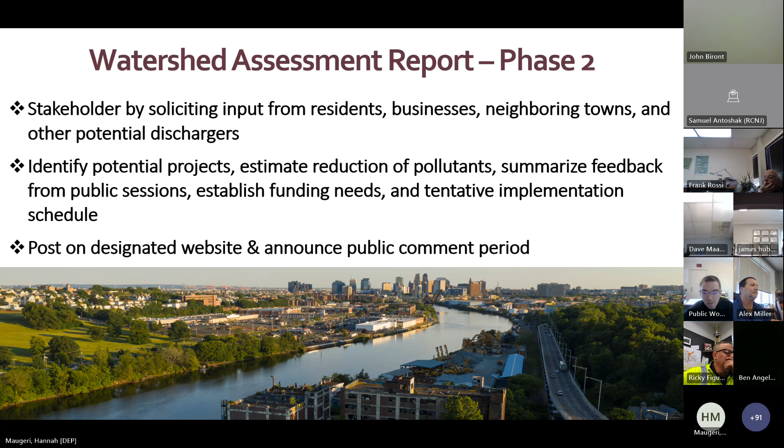All right, so phase 3, the watershed improvement plan report, the final phase. This will take the information presented in phase 2's report, which was public noticed, and then you will evaluate those public comments, the cost, the funding that is needed, etc. It will also identify which projects are to be implemented, including proposed timelines and expected results.

This report will need to include a summary of project locations and expected load reductions. It will also include the rationale behind the chosen projects and plans to incorporate other regulatory requirements, implementation schedule, and costs. So this plan will need to be reviewed and updated when necessary, based on the biennial review of the impairments of the permittee's water bodies. That's going to be based on the department's integrated report and any newly adopted TMDLs, as well as updates to any of the overburdened communities layer, and then any other updates.

And then finally, I want to mention that we're preparing a WIP template, including guidance material for permittees to use. This way, all WIPs are developed statewide following the same format to make it easier for the public and the department to review and compare. We'll share these materials as soon as they are finalized.

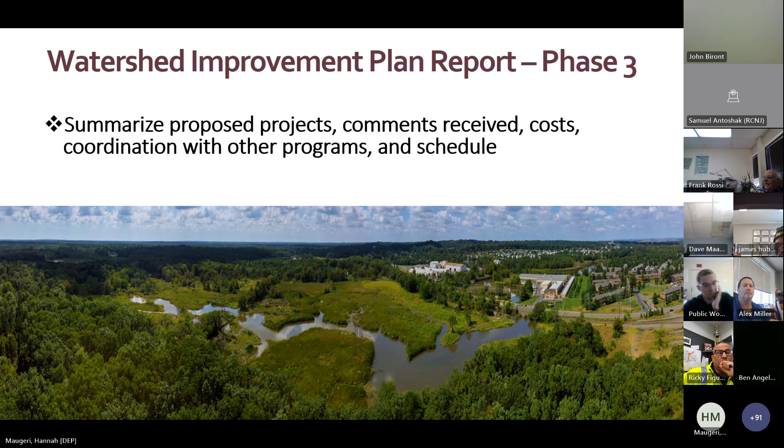All right, so moving back into the permit conditions, the last final permit conditions here are going to be additional and optional measures. So the department will notify you if there are any additional permit requirements that your facility needs to adopt. This does not happen often. Such cases would result in minor modifications to this master general permit and will require the permittee to meet either numeric effluent limitations or implement new or enhanced best management practices.

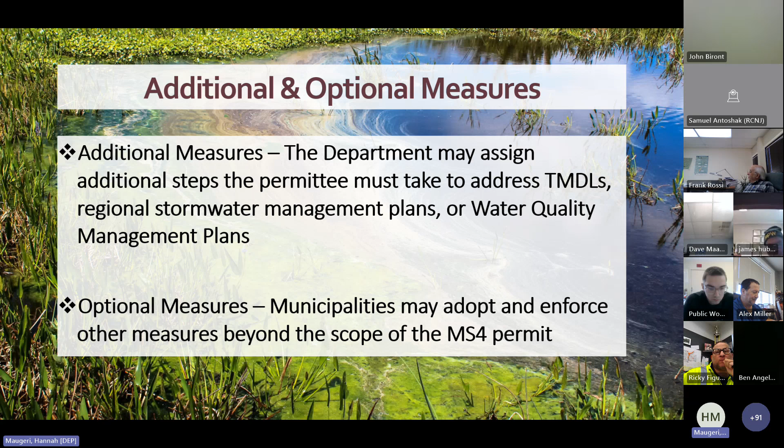And then for optional measures, you are allowed to adopt and enforce other measures to your facility's stormwater program that exceed the requirements in this permit. For example, you may have an ordinance requiring all dumpsters on private properties to be covered, or you may have a problem that is unique to your area that relates to stormwater that you want to address. All of these are acceptable.

For record keeping, very important task. When the department or EPA staff come out for an audit or a site inspection, we'll be looking at your records to demonstrate compliance with each permit condition. So one of your main jobs as the SPC is to have these records ready upon request. Be sure to keep copies of logs that record inspections, any repairs, any investigations, any training, all of these related to the permit compliance for at least 5 years.

And then the annual report and certification: every year between January 1st and May 1st, all permittees will report on the previous calendar year by accessing NJDEP online to submit their annual report. Tier A municipalities are also required to complete and attach the supplemental questionnaire. If you discovered any cases of illicit connections within that reporting year, you're also required to submit those illicit connection inspection reports as attachments to the annual report.

Public complexes must attach an outfall inspection, stream scouring, and illicit connection form to their annual report each year. If you're new to submitting an annual report and would like to see any previous year's submission, feel free to contact your MS4 County case manager and they'll provide whatever reports that you request.

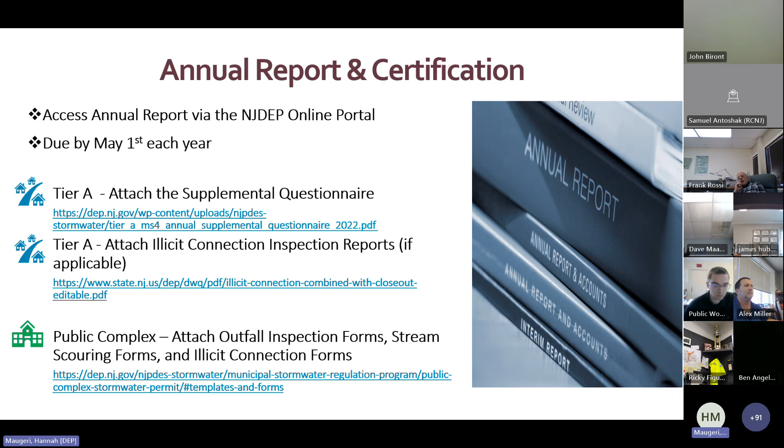And then some NJDEP online tips. Many of you may already be familiar with NJDEP online, as this is the platform where you access your annual report each year. Some helpful tips we've put together: create your own account. You cannot finish a report that another user started. Contact your case manager if you're unable to complete the annual report, as reports may be in progress in another user's account.

It's very important to write down your username, your password, and certification PIN. Accounts are managed by NJOIT, not us. If you forget your username or password, you will have to use the on-screen help function, and then somebody from NJOIT will contact you to help correct it. We cannot change your username or password or recover any of that information for you.

Something new to NJDEP Online with the last two permit renewals is that permittees are now going to use the portal to access the facility submittal service to submit all other required documents. This would be maps, the SWPPPs, any MS4 documents, and then anything else you want us to look at.